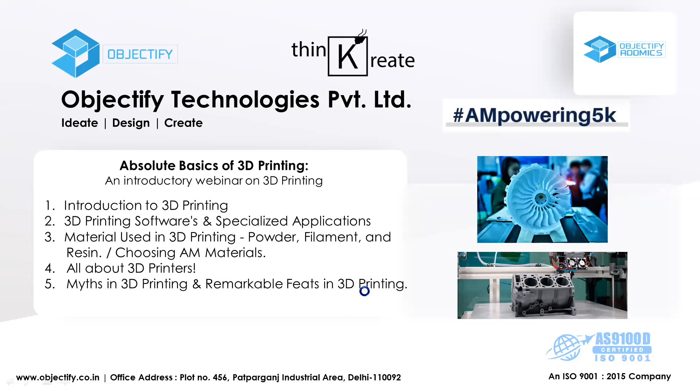I think we have a good number of audience who has dialed in, and it's 3 o'clock as well, so I will take you through the context. Ashish, would you like to give a recap of the previous webinar?

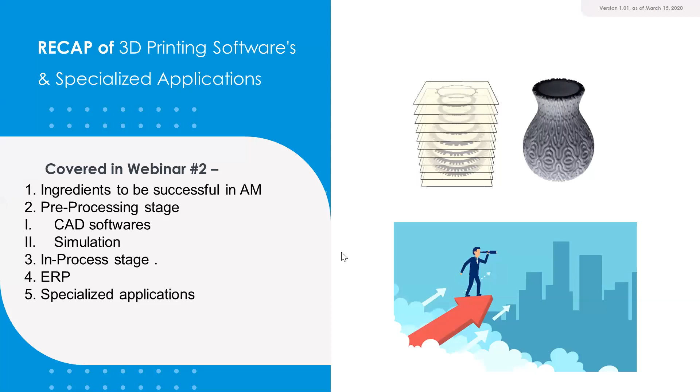We also talked about certain specialized applications using topology optimization, and applications such as conformal cooling. We also showed a video on bioprinting, and certain images on how you can make organs on a chip. So these were some of the main topics we covered in the second webinar.

Now we'll move on to the third webinar, on the absolute basics of 3D printing. Rahul sir, you can continue.

Thanks. So today we are going to discuss all about materials. Since 3D printing's inception, there have been a few very popular materials, but advancement is happening at a very rapid pace - how certain materials can be qualified on an existing platform, and what new platforms are being developed where you can get novel characteristics and properties of a material. That is a hot topic, and everybody is doing research and development from an industry standpoint as well as in academia. So let's begin.

Again, to introduce those who joined slightly late, I'm Rahul Pise, general manager of Objectify Technologies, located at the Noida facility. We have two facilities in Delhi NCR area - in Delhi, at Patparganj, a polymer facility, and in Noida, a metal additive manufacturing facility. So we can print a variety of polymers as well as a lot of different alloys of metals, be it ferrous or non-ferrous alloys.

So let's begin. First of all, I would like to understand the audience makeup so that I can frame my presentation as well as give illustrations and level of detail accordingly. Sankha, can you run that poll? Yes.

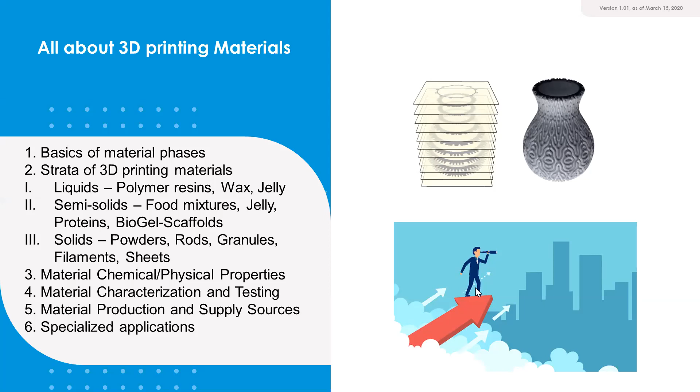Yes, I think most of the people are either aware or having a good amount of understanding about engineered polymers, engineered alloys, and material developments. Very few people have no scientific background, but they at least have a level of understanding with hands-on use - they didn't pursue basic education in material science, but they use it everyday and they know the terminology, the properties, how it should be judged. So I think it's a good mix of people, but most are aware about basics. That is good for me as a prerequisite, so I can explain a little bit more advanced stuff and also cover the basics for those who are absolutely novice.

So let me begin with the basics first. As I mentioned, the characterization of material - the character development - is something very crucial for any story writing. When you are creating something and expecting performance out of it, be it a human being, a living object, or a durable or perishable product, its story is very important, and the character is something that writes its story. So the structure of the material, the properties, the performance, and processing revolves around the character. Material characterization - I think the character of water we know very well, that's why I showed here the phase of water. Liquid water to solid water, how it does the phase change, and solid to a gaseous state. All that terminology is very basic, and people are aware that solid melts to a liquid, and again when it cools down it becomes a solid.

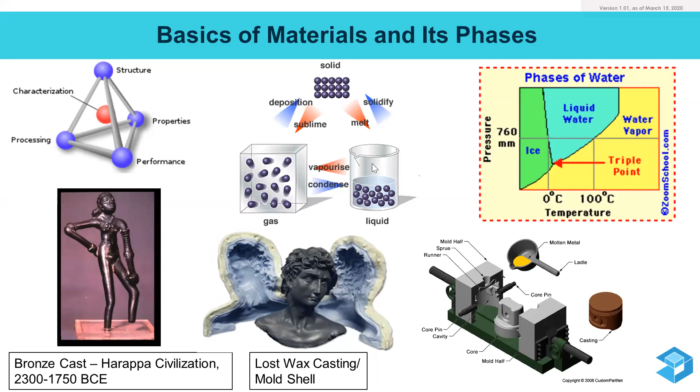Let's begin with the general strata of materials being used. Some of you are familiar with these materials or have used them firsthand. The desktop machines are more popular, where wire filament is fed - it's very cheap as well. For around 50-60 dollars, about 2000 rupees, you can get a spool of this wire and feed it into a 10,000 or $15,000 desktop machine. Some academic institutions host this type of machine just for basic awareness and experimental use.

That's the fused deposition method. Ignore these acronyms - we'll cover a separate session about mechanization and automation, the platforms developed by different machine makers. Today's focus is mostly on types of material, in which format that material is fed, and how to characterize it.

In case of polymer, we have liquid resins, powder form, or filament form. Certain polymers are fed in granule format as well. This is a very common format of material being fed in conventional industry, and similarly in 3D printing the similar format is utilized. The filament format is very popular, but atomized powder format, granules, as well as liquid resin are more popular with industrial grade 3D printers.

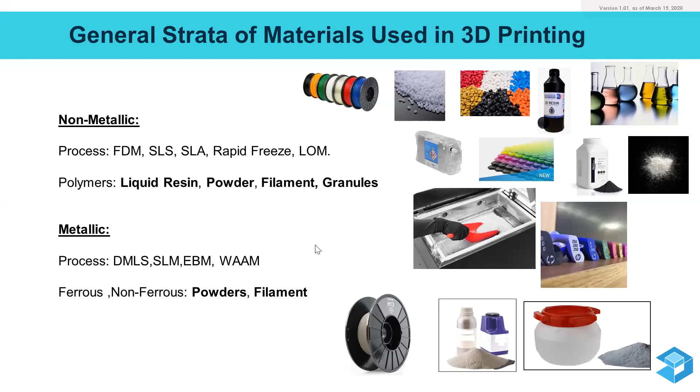Again, with the general strata in context of 3D printing technology, just ignore these terms for specific acronyms used for the technology. Look at the materials, how the transformation is happening, and what quality you can expect in terms of durability, surface finish, level of detail, or resolution of a geometry printing process and its application.

Starting with the horizontal row of ceramics - you can do either binder jetting or laser melting to form ceramics. Metal, mostly melting processes, using laser or electron beam. In case of sand, again it's binder jetting.

Plastics have a wide spectrum of different possibilities. The wire filament fed is melted and resolidified - that's very popular, and you might have seen those sort of printers. That's the filament-fed machine where melting and resolidification happens.

Similarly, powder fed - in that case as well, a focused beam of high power laser locally melts, and again you get it solidified. That way of melting and resolidification happens in polymer.

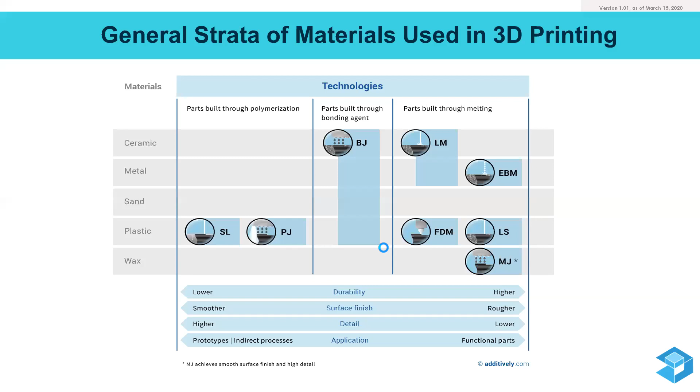Here is just a definition of what 3D printing material is. Any sort of material that you can deposit layer upon layer to do either phase transformation or adhesive bonding. It can be extruded, selectively sintered, melted, or welded, whatever the process may be. But instead of taking material from a solid chunk or directly pouring into a cavity, the shape is formed by slices of layer upon layer deposition.

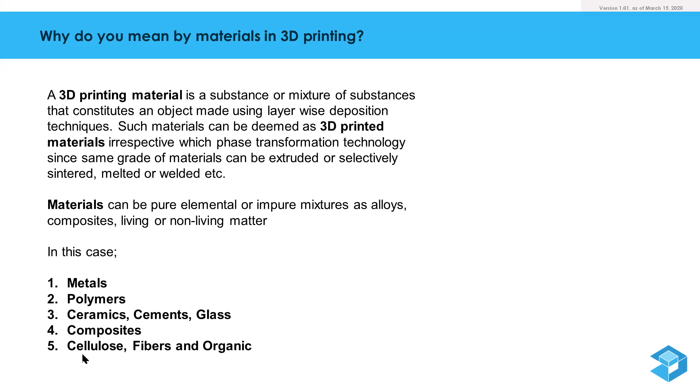So that is what 3D printed materials are, and most of the materials that are possible are metals, polymers, ceramics, cements, glass, composites, cellulosic materials, fibers, and some organic materials as well in recent cases.

So how can we classify these materials? I think the basic elemental physics - the elemental pure substances are there. Those substances form bonds, either ionic or covalent, and those are compounds. Either elemental and compound mixtures can be there, or just compound mixtures can be there, and those mixtures can be homogeneous or heterogeneous. So based on that, I gave you a visual of a few good examples.

Pure gold, 24 karat - I think people are aware of that because of its high value. It's very malleable, ductile, and in its purest form, nobody wears it because it's too malleable and will deform its shape very regularly. That's why they add certain impurities to pure gold, making it either 18 or 22 karat with the addition of copper based alloys or other alloys. So what happens is it forms a fused homogeneous mixture, and that 22 karat gold can be molded into a specific artwork or jewelry type of geometry. That's why most often in case of engineered products, you are looking at mixtures.

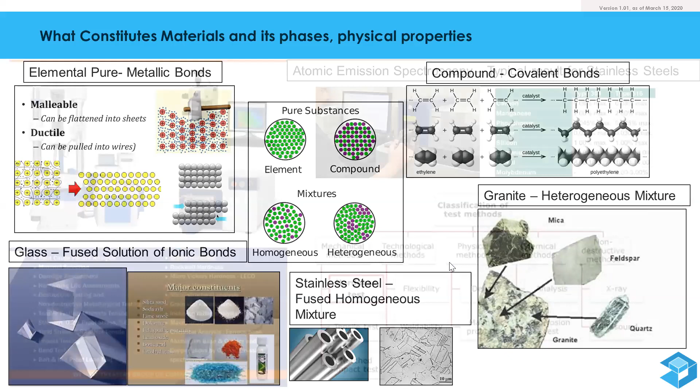I'm sharing with you the different chemical and physical properties you need to characterize. Once you know the basic construct and makeup, you need to ensure that whatever you are claiming - a specific stainless steel grade like 304 or 316 - you can characterize and define its quality based on its pure form of ingredients in a specific mix. You have to do a test method to identify and check the consistency continuously.

That is something offered as services by certain labs and manufacturers. So there is a long list of methods available.

In case of material, chemical composition is one thing. Once that makeup is established, you need to do mechanical testing to know its behavior in terms of tensile strength, hardness, flexibility or ductility. Can it be welded? How dense will that part be because of that, and will it be heavy or light? Its magnetic properties also matter. There are non-destructive methods as well, so you don't have to again and again break the parts to do the characterization. There are latest methods using X-ray or ultrasound or other non-destructive techniques where you can still characterize the quality of the material. So these are the typical classifications of test methods.

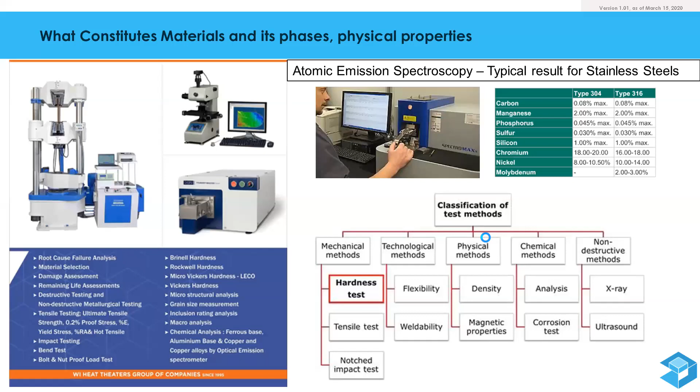I'm just listing these for your basic understanding. You can refer to metallurgical courses or material science courses to go into the absolute basics of how performance is tested and justified for quality after test results are submitted.

In case of most metals, they do the tensile test to understand the Young's modulus, so that you know how tough it is under load. That is something checked and looked at. Similarly, compression test is done for most building materials to find out the compressive load that material can take up - bricks, and reinforcement members made up of steel.

Hello, there seems to be some technical difficulties. Rahul sir, are you there? Yeah, I'm getting back in. Okay, I think there was some issue. Okay, everything is fine now, back to normal. Continue sir, thank you.

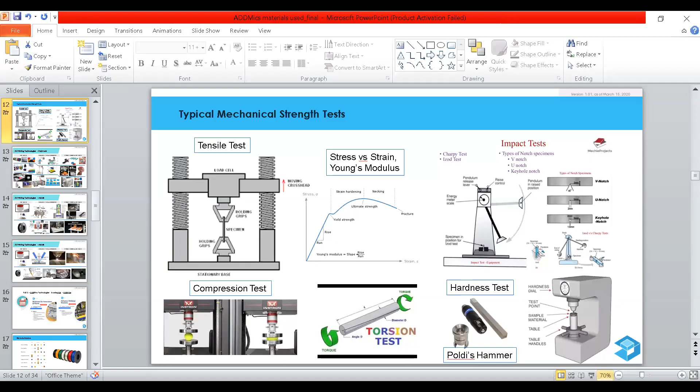I was briefly explaining different types of mechanical strength and characterization test methods. So the ones I mentioned were tensile and compression, and then there can be a torsion test if it is a power transmission shaft or that sort of object. Hardness is also a very crucial test method because most parts wear and tear and get worn out and damaged, so hardness is also key for performance.

Impact testing checks whether the material can withstand any sudden dynamic load conditions that object is going to experience. There are Charpy and Izod type impact tests. What it essentially does is you make a specimen out of that material, and with a swing you try to break it, and the amount of potential energy that swing was having is recorded. That's how this test happens. So there are different ways of characterizing material behavior.

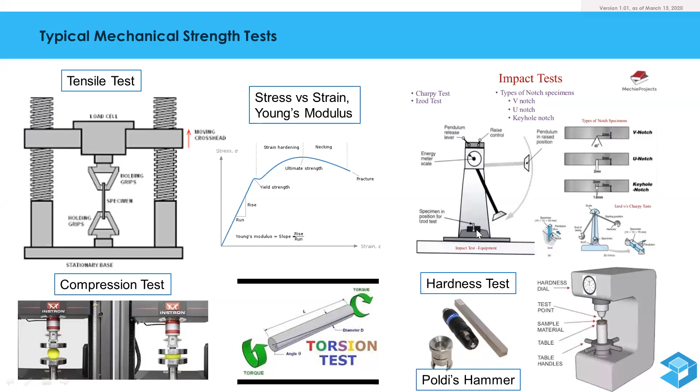So this is just the mechanical aspects. Coming back to 3D printing, how that sort of material behavior can be used in an advantageous manner so we can get the desired geometries and material properties - that is something of our interest, and that's our core agenda today.

I will not be going into the patented system that we are going to discuss in the next webinar, but you can look at the raw feed, how it can be processed through specific automations to get different outcomes in terms of applications, geometric makeup, strength, and appearance. Most commercial people as well as most laymen don't look at the details of the technology. They don't focus on how - what they want is what, and why I should go for that.

So that needs to be readily available information whenever someone needs to be convinced about use of 3D printing. First, what is it, what is its geometry, what is its mechanical strength, what are its physical and chemical properties, and how can I utilize it in end use applications. That is the end user's question, and why should I use it, because if there are conventional ways they are getting those objects, what is the value addition this technology is going to bring? That needs to be solved, convinced, and communicated effectively.

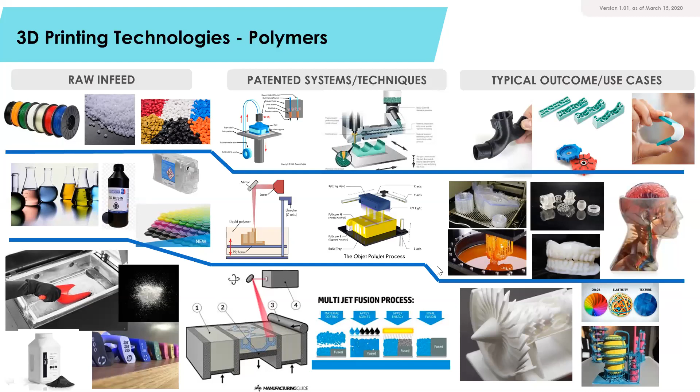Okay, so I will go over to the metal side now. In case of metal, either you can feed with wires or feed with powders. So there can be different techniques: either it is powder bed fusion where solidification of the powder is happening with either a laser beam or electron beam, or it can simply be binder jetting and later on a sintering process.

So typical outcomes of that are in aerospace, automotive, and oil and gas industries. A lot of metal alloys and different mixes and varieties of metal alloys are needed, and it's a very huge discipline in itself. So powder metallurgy as well as conventional metallurgy, you can pursue it as a career.

And in case of 3D printing, it is opening up a new door. Powder metallurgy is getting popular and is elevated to a totally different level in how you can characterize, make up the specific alloy, and process it successfully to get its quality at desired conditions. That is something evolving continuously.

Although ferrous and non-ferrous grades like aluminum, titanium, inconels, and stainless steels were very robustly adopted and getting into the mainstream, there have been recent efforts to qualify copper and tungsten alloys as well, which were difficult earlier. People have cracked the methodology and the science behind it, and nowadays you can get those grades of material.

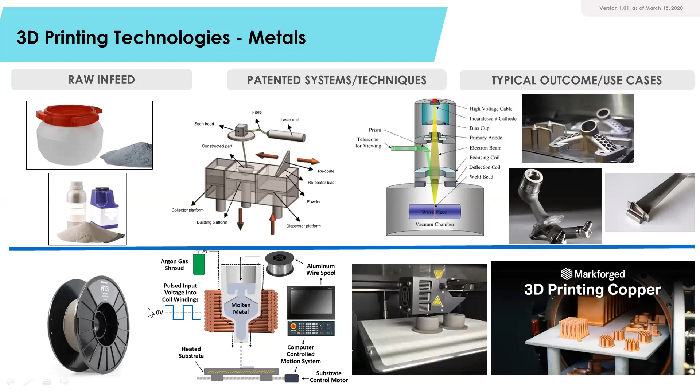Powder-fed or wire-fed machines can be used, and you can locally reheat and melt and cool down and solidify that sort of material, and you can get different sorts of geometries.

Now I will speak about polymer grades. Again, don't focus on just the acronym, look at what it can do for you. How easy it is to print should be the first question coming to you when talking about 3D printer materials - how easy it is to print, its visual quality and appeal, and how much stress and load it can bear so it performs in the end use application during a duty cycle.

What is its strength in terms of elongation at break, or impact resistance, or layer to layer adhesion it can guarantee, or certain heat resistance or flame retardant properties expected from certain polymer objects. The typical grades in filament based fused deposition modeling are polylactic acid, ABS which is acrylonitrile butadiene styrene, PET which is polyethylene terephthalate, nylon which is polyamide, thermoplastic elastomers, and polycarbonate. These are the typical grades used in filament polymer based manufacturing using 3D printers.

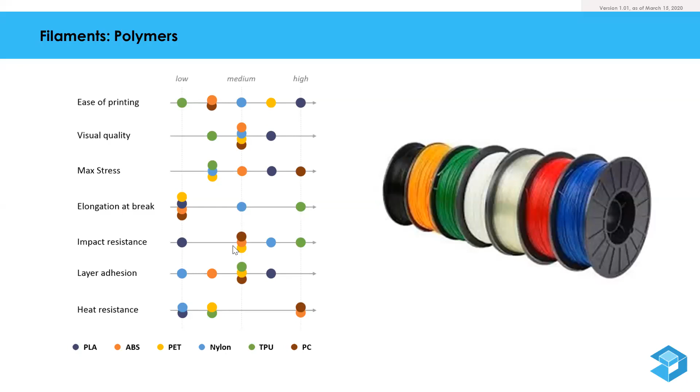Similarly, in case of metal, you can either have bronze, copper based alloys, or stainless steel, and those sorts of metal alloys in ferrous grade and non-ferrous grade as well. So again, going back to polymer.

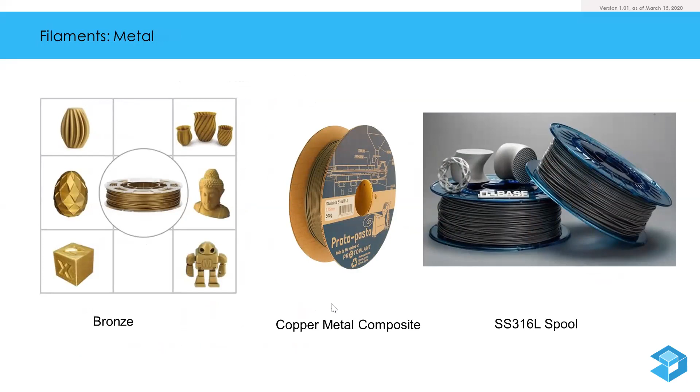First I covered polymer filaments and metal filaments because the format of the filament can be remembered easily. Now I am going into a powder bed type platform and sharing different grades of polymers as well as metal. In the case of polymer, nylon was the first one that got popularized, being a polyamide substance which can be locally melted very easily and resolidified. It doesn't have a very huge shrink profile, so it can retain the shape robustly, and the heat affected zone doesn't get deformed easily. That's why nylon was the first one to get qualified.

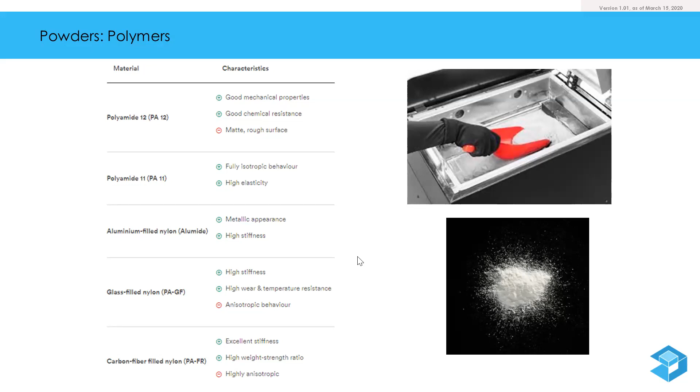Later on, certain composite mixes with aluminum, or glass filled, or carbon fiber filled nylon grades became popular. Nowadays polystyrene is possible on this platform as well. Another recent breakthrough I heard was that polypropylene has also been successfully qualified, being a very regularly used consumer grade polymer. Similarly, in the case of metal, there are a huge number of alloys being looked at and qualified - austenitic stainless steels, different sorts of cobalt chrome, copper alloys, duplex or special stainless steel, and tool steels.

Maraging steel is a kind of tool steel. Martensitic stainless steel alloys. Then nickel alloys like Inconel, CM247 - these high temperature application alloys. Similarly, titanium is also another grade where high strength to weight ratio components for aerospace are used.

Titanium is also popular for orthopedic surgeons looking for a solution where a metal component can be absorbed inside a body as a structural member, where a bone is destroyed in a crash or accident and replacement is needed. Titanium is a very popular alloy in that category. So these are the typical powder bed type of metal alloys possible.

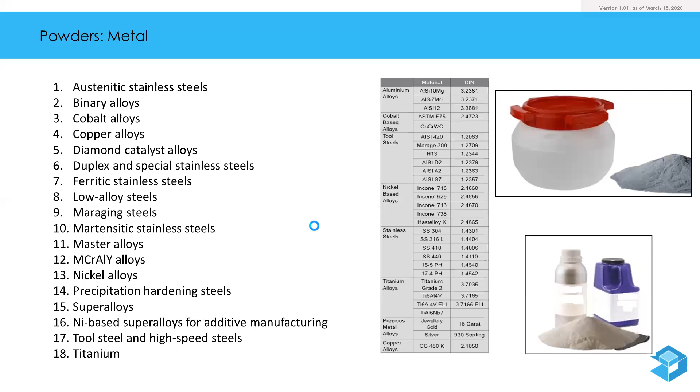Now I will move to liquid based resin polymers, since I covered filament, both metal and polymers, then powders, both metal and polymers. In case of liquid, only polymers can be there. The liquid resins are either acrylate, so polyacrylate based resins which are clear, or polycarbonate as well, clear. Then standard other kinds of resins which mimic ABS-like behavior, or other grades of polymers - those are again based on acrylate.

Certain castable resins are possible. Either you can use wax, or there are certain polymer grades which are very easy to melt at lower temperature, and it almost behaves like a wax, and you can use it as a jewelry wax substitute, and it is being used in the industry very regularly. As I mentioned, in case of dental applications as well, a lot of dentists are planning the dental procedure by mimicking the structure and makeup of a teeth. That is very popular as well.

Certain elastomers are also possible - thermoplastic elastomers, I mentioned TPU. So that sort of resin can be 3D printed, and certain composites can be made as well. You can have a photopolymer base, and on top of that you can add certain ceramic infill, and you can get a good quality tough type of outcome and parts.

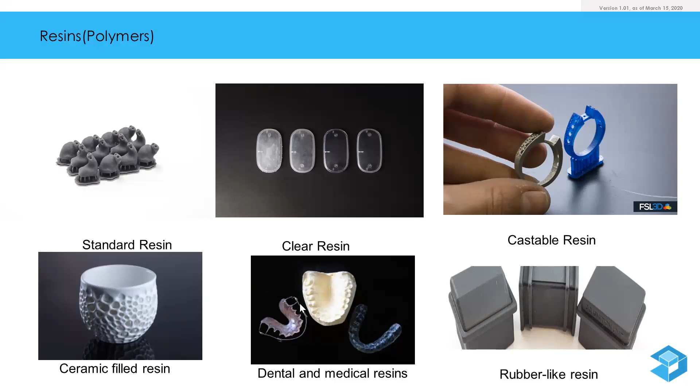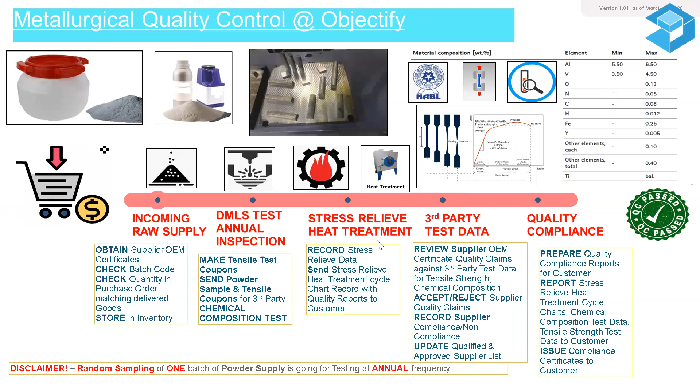So now moving on to how we adopt the characterization methods. I'm specifically sharing the example of metal because that's the everyday problem solving I'm doing for our clients. We have a raw powder that we obtain from the powder suppliers, and we do the process planning and make the tensile coupon samples and other impact test samples, as I briefly mentioned, and we do the characterization and find out its acceptance criteria and whether we are meeting that, and that ensures the quality compliance for our products that we produce in our facility.

Now I am covering some non-traditional methods, how these materials are being manufactured, and some very advanced applications. One such material is very difficult to do - there is a misconception that all materials can be processed very brilliantly, but glass is one exception, because glass usually melts at 1800 degrees Celsius. So it's very difficult to work with in order to melt it and resolidify. In case of resolidification as well, the shrinkage profile is not that stable, so you need a lot of R&D type of effort.

So these are a few trials done by MIT lab, and they managed to adopt the filament based, extrusion based type of principle, where they are melting and extruding the material, depositing layer upon layer. But the resolution and accuracy is something that no industry can adopt, so it is just remaining as an artistic method. Beyond that, there are no use cases found so far. But there is research still going on so that they can reduce the layer thickness and process this much more brilliantly.

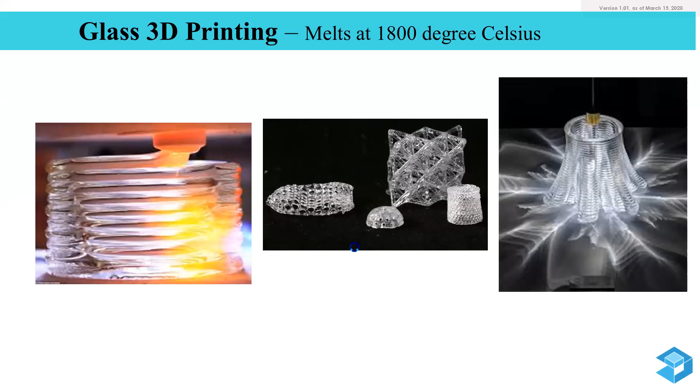So moving on to how the materials and production happens in supply sourcing. Most of the polymer, as you know, are petrochemical derivatives. The petrochemical industry forms those grades of polymers that I mentioned from crude oil. Those can be transformed into filament using the extruders, or it can be atomized using the cyclone atomizer or a spray technique, those sort of techniques.

Recycling is being looked at very seriously in case of the 3D printing industry as well. Conventionally, a lot of polymers are going into landfill and being a waste in society and a nuisance for society. So people are looking at how we can adopt and utilize recycled plastic grades and use them for 3D printers. Certain byproducts of the recycling industry, the polypropylene and those sort of grades, if purified, are still being utilized in a conventional way.

But the polylactic acid or certain recycled PET material, or PVC, that sort of material, if it is recycled, people are looking at 3D printing to make something useful out of just waste lying in the landfills. So that's also getting very popular in terms of supply sourcing alternatives, rather than the conventional expensive supply from the petrochemical industry.

Now taking a look at the metal powders. Powders are formed either using a water spray jet technique, where the melt pool is atomized with a jet, or similarly, gas atomization is also popular, where a cold stream of inert gas is fed to a melt pool and it creates the powder.

But in both cases, the granules formed are suited for techniques like cold spray or direct energy deposition. In case of powder bed fusion, however, you need a spherical type of powder so that it is easy to flow.

Those sort of powders are made using the rotating plasma electrode method, where helium inert gas is supplied and a plasma state is achieved, that's another state of matter. Under centrifugal force, those particles cool down and form spherical shapes. This is the most desired technique, and we have suppliers who can produce good quality powders using these technologies.

We are utilizing ferrous and non-ferrous alloys like titanium, inconel, stainless steels, tool steels, aluminum, and cobalt chrome. All these alloys we source and use to produce components as per the technical requirements, the geometric makeup, and the physical strength specified by industrial clients.

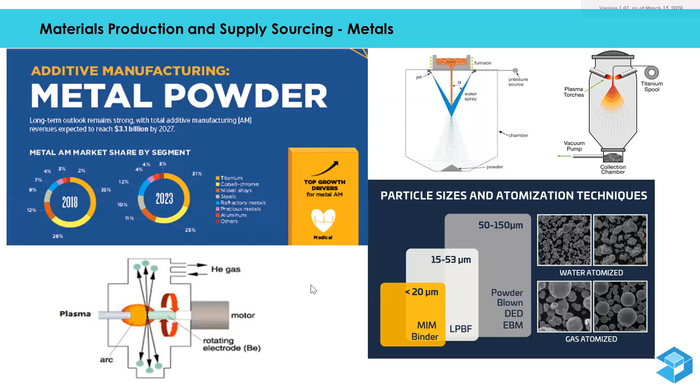I think I covered most of the core webinar, where I wanted to share the absolute basics: material properties, physical properties, and the way those materials come into existence in terms of production techniques and how you can characterize them.

There's a very popular saying: garbage in is garbage out. So as much good quality substance as you can feed in matters, like with the human body - we're careful what we take as our diet, preparing meals carefully so our system functions efficiently and our energy throughout the day is best. Similarly, in an industrial setup, you should look at best quality powders, best quality methods, best quality proven techniques, and ultimately the resulting outcome is accepted by all industrial players as well as end users. That is the key.

So I'm now sharing some of the novel approaches and breakthroughs that happened - the tiniest material being transformed into very brilliant products, from small scale to very large scale.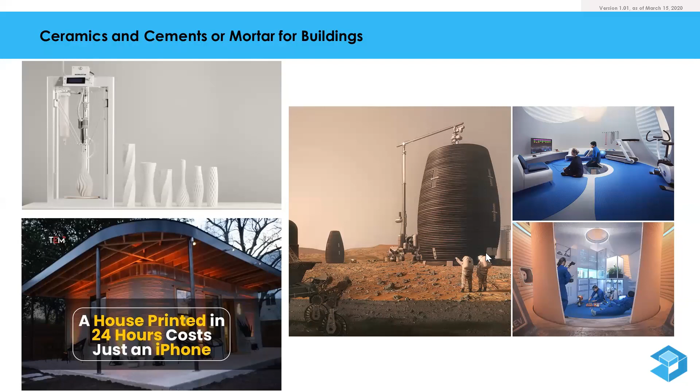Now going on to food as well, since we are looking at space applications and going beyond our horizons, how can you store food and make something nutritious as well as delicious. So that is being looked at, and you can mechanize the food making. Pizza is very popular, so they first looked at pizza in space, and were successful in storing the substance easily for prolonged duration, and were able to form the pizza out of that sort of 3D printer.

Other food substances are being looked at too. Certain popular materials are jelly based, cheese based, or starch based - sugars, cellulosic starch, mashed potato type of thing, or chocolates. Those powders can be bonded with some sort of sticky adhesive, just a sugar syrup you can imagine. So that is being looked at, and the same platform can be used to make food items. That's how people are being disruptive.

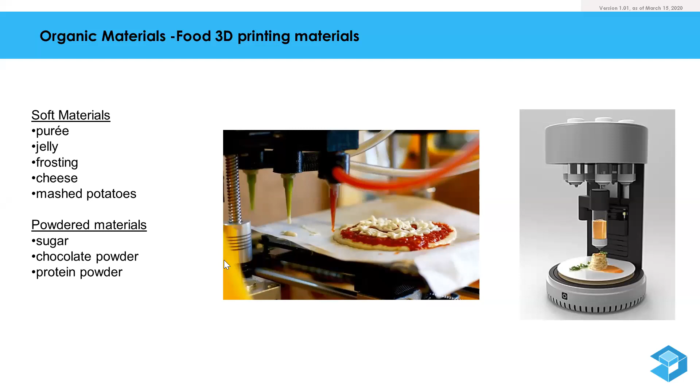Another example is a serious application being looked at in research and development for organic substances to be printed. They are looking at collagen kind of scaffold making, so that someone who gets disfigured or dismembered with damaged living tissues and cartilage can have those replaced, and plastic surgery can be done. So those bioinks are being looked at. Then for quick healing of bigger wounds or burn marks, those bioinks can also make artificial skin which can grow on top of the wound. That is being looked at.

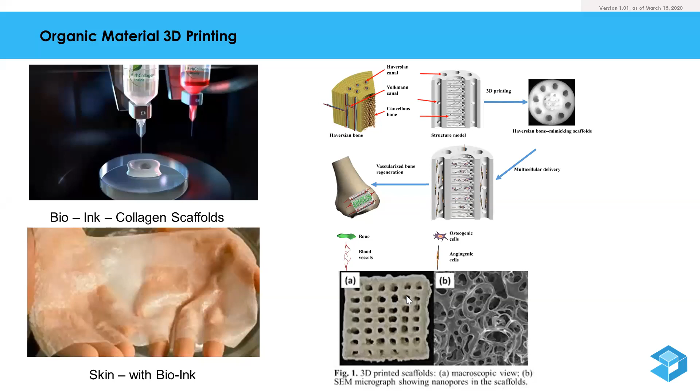Similarly, in case of bone, as I mentioned, a foreign body of a metal sort can go bad because it can be rejected by the body. But they are looking at biocompatible substances that you can print, and the body can absorb and grow on top of that. So that is being looked at. These types of applications are very popular.

Then at bigger scale, I showed an example of the biggest ship hull that they can produce single-handedly using automation and 3D printing. Similarly, look at how small it can go - you can see 100 nanometer resolution type of 3D printing. Over here you can see this is the needle hole, and the bigger body over here is a hair cuticle, and our hairs are almost 100 micrometers across. So it is going to a level tinier than our hair cuticles. That is the level of brilliance being achieved.

Some of the objects made using this technology show a brilliant level of detail. This technique is called nanoscale 3D printing using two-photon photopolymerization. So the similar sort of liquid resin gets polymerized, but the scale at which it is exposed to light is very precise, and that's how they achieve these tiny scales.

And it's used in micro scale mechanisms for micro scale applications - electronics, certain sensors, that sort of stuff being made using this technology. Or sometimes very tiny transparent lenses can be made as well, used in specific applications. So those are being made using these types of technologies as well.

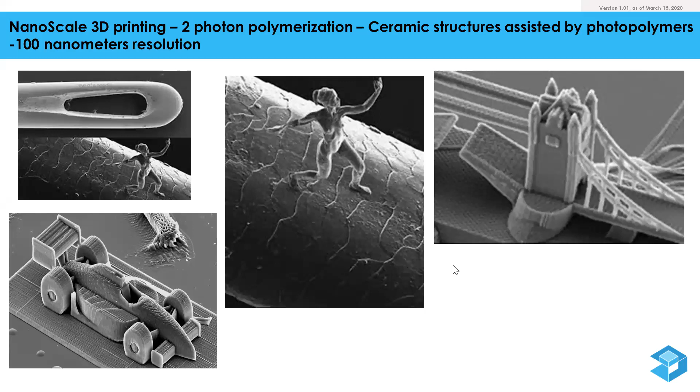Then, last time we got a question about what is 4D printing. I tried to answer it, but the visual is the best answer than audio, so that's why I'm showing a visual of that. We know that with one-dimensional information, we knew only counting with lines like this. But with two-dimensional, when we were successfully able to jot down on a piece of paper and draw, we could communicate, articulate, write symbols, make language - all that sort of innovation has occurred, and up to a certain extent you can replicate certain old architecture models.

So if you are looking for an architecture model of the Taj Mahal, there had been certain old pamphlets or layout planning type of discussions that you can refer to, looking at the historical data, and you can make a scaled model referring to that sort of 2D drawings. Nowadays we are talking about 3D. In case of 3D, you can store even more good amount of information for prolonged duration - how the geometric makeup was, what its processes were, that is being documented, what alloy was used. That's product life cycle management, an overall enterprise written around the core three-dimensional information.

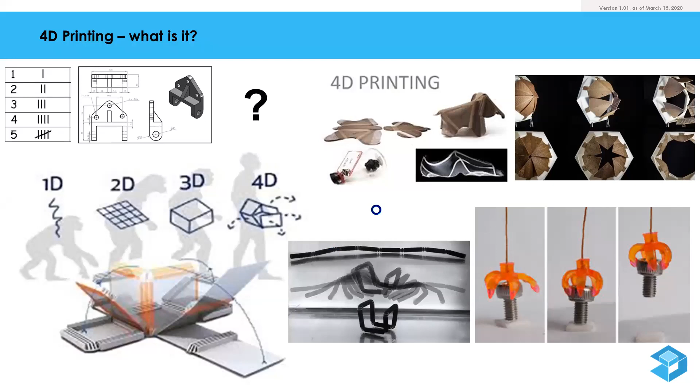Now what lies ahead in future? Can it go even one step ahead? I'm trying to end at a very elevated pitch or elevated expectation. So what they are talking about is smart type of materials - each individual constituent can be brilliant to morph a shape as per desired use cases. One example is in robotics.

We haven't reached miniaturization and making very tiny and reliable micro robots yet. But on the meso scale itself, they are able to make certain robots which have a consistent individual element, but when it works in a group, as a brilliant swarm of robots, it can morph its shape and deliver certain unique use cases. So the same sort of robot structure can form a different shape and go into tiny spaces when any sort of tragedy happens and look for living bodies, or go and shut down certain critical functions if needed in certain accidental cases. So these type of robots are being looked at.